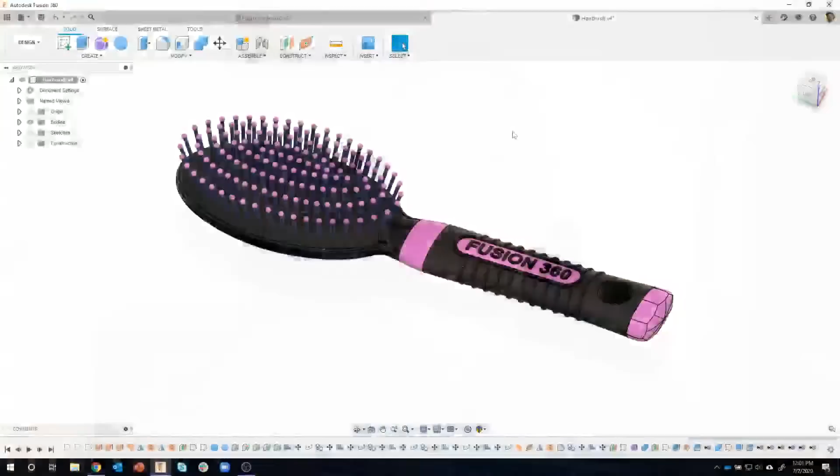So I'm going to go through and show some tips and tricks on how you can use pattern on a path. I'm not going to be able to do the whole brush today, I'm going to focus mainly on the head, but taking a look at the handle right now - pretty simple shape, kind of an elliptical shape. You can tell I used a free form to connect to that, and I'm actually basing this off of my wife's hairbrush. Hopefully she's not missing it right now and comes looking for it. But anyways, let's dive right in.

So I'm going to start by creating this curved surface. It's a little hard to see because of the black, but I'm creating this curved surface, and then we're going to use that to help us define the direction of these pins. You can see how they're perpendicular to that surface, and that's kind of the cool thing with today's project.

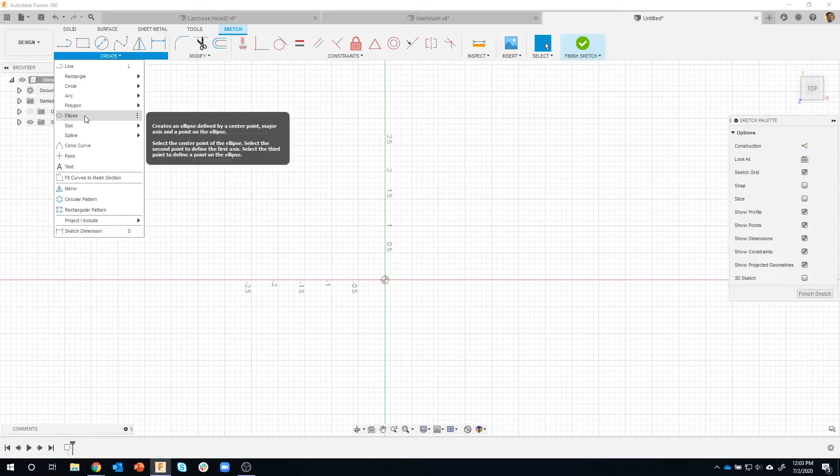Okay, so some of this is going to be similar, some of it's going to be new, but I'm going to start out by creating a sketch, and I'm going to start with an elliptical shape. Now, I don't use ellipse all that often, but in this case, the shape of the brush is an ellipse. So I'm going to start with the ellipse command, and it says place the center point.

So I'm going to start here, and then it's asking for either the width or the height. I'm going to go ahead and do the height, and according to my measurements it's 4 1/4 tall. Then I'll hit the tab key, and you'll notice even though my cursor is way above this, it's basically asking for the angle of this ellipse. So I'm going to click up here so it's vertical, and now as I move my cursor to the right you can see the overall length of it, and now I can say it's 2.5 inches wide.

Okay, so let me just move a couple of these dimensions so you can see what's going on here. So I created an ellipse, 4 1/4 tall, 2.5 wide. Now, with this project, we're basically going to be working in one quadrant and then mirroring a couple times, so I'm only going to work in one quadrant. Well, you'll notice that this is all one spline, or in this case, an ellipse.

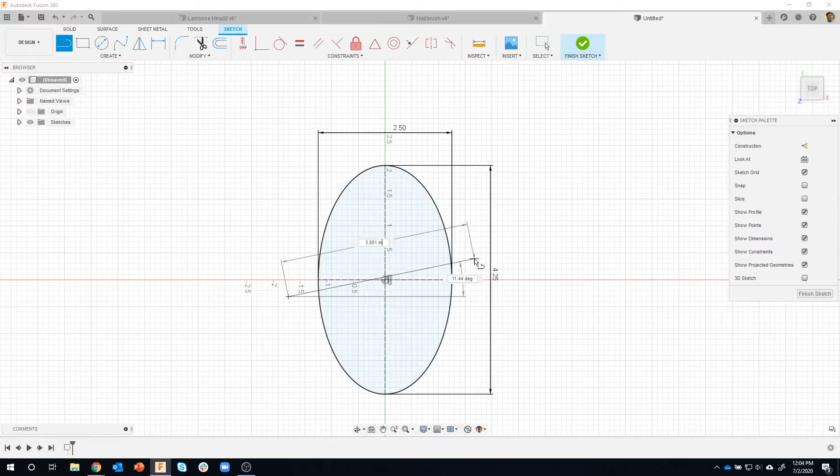So I'm going to create some geometry that's going to help me split this apart, and you've seen me do this before. I purposely over-exaggerate - instead of trying to draw a horizontal and a vertical line, I'm just going to do something like this. That way, when I come in and constrain it, I can visually confirm that everything's correct. So for example, I want that line to be coincident with my center point, and I can visually see that it jumped to the center point.

Same thing from there to there - I can see that it's now going through that, I shouldn't say center point, I should say origin point. Then I'll come in here and say horizontal, vertical. I'll click on that line and I can visually see that it's now vertical, click on that line, I can visually see that that's horizontal. You don't have to do it that way, but to me it's confirmation that it was done correctly.

I can also see, if I expand up my sketches, that these lines are black, and that means that they're constrained to the origin, for example. So I'm going to change these to construction geometry - let me just make sure I get that line there. So now you can see that those are construction geometry.

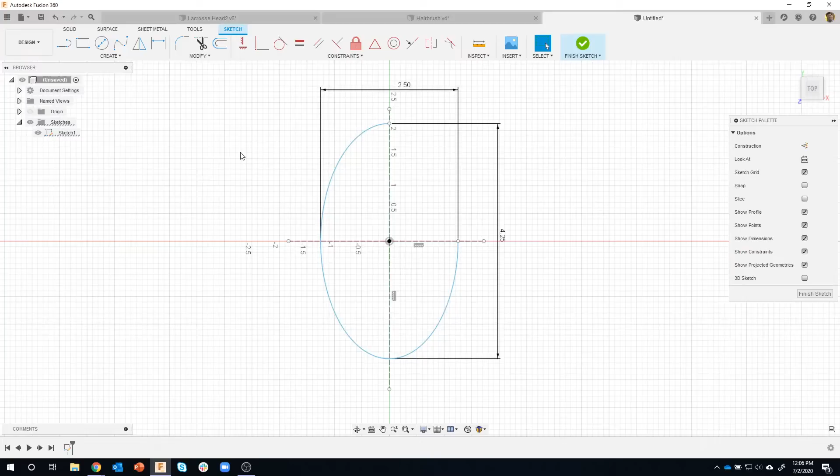Okay, so like I said, I need to split this, or we use the term break - I need to break this into quadrants. So under the modify command, there's a command called break. Now trim physically removes geometry, so if I came in here and said trim, it's going to physically remove that section. What break does is it just basically breaks it.

You'll see, it's kind of hard to see, but as I hover over, you'll see a little red X up here, and a little red X over here. So I'm clicking on this segment, and notice it warned me that by doing that we're going to lose some of our constraints, but that's okay.

Now you can see that this is its own segment. If I come over here, you can see it's 3/4 of a segment. When I said break, it went to the next intersection, right here, and broke it at that intersection, and at this intersection. So same thing right here.

I'm just going to hover over this line. You can see the red X appearing in this area. So I'll click, and I now have 2 segments. So we're basically breaking it. You'll notice it's still a valid profile.

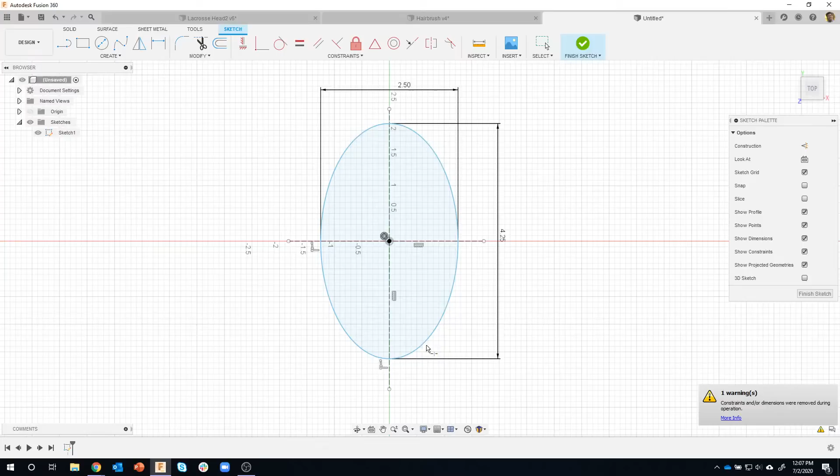I'm not trimming anything away. So I'll go ahead and break that segment there. I don't need to break this one, because by breaking it here and by breaking this one up here, it became its own segment. Okay, so that was the break command.

So I now have the overall shape of basically the head of the brush. Now I want to create the curvature, and to do this I'm going to use surfacing. But I want to create some geometry that's going to help me create a nice surface, so I'm going to continue drawing some geometry here.

So I'm going to say, let's create a sketch on this front face. Now here is where 3D Sketch really helps out, and let me show you why.

I want to create a spline. So I'm going to go spline, and you'll notice it's not snapping or catching to this profile because I haven't projected anything. There's nothing on this sketch. You'll notice if I turn off my original sketch, there's nothing there. So that's why it's not catching to it.

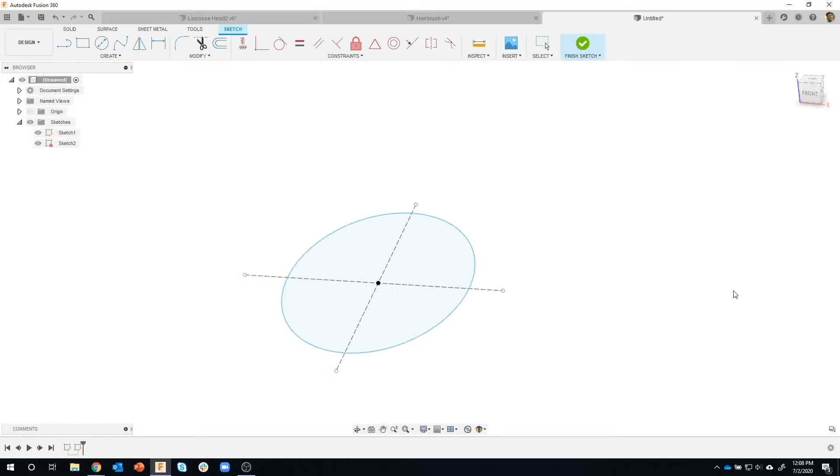However, if I turn on 3D Sketch, it doesn't instantly put me into 3D Sketch. So here's one of my tips: I turn it on, I say Finish Sketch, then I edit that sketch again.

And you'll notice it's turned on. Now when I do the spline, you see this triad icon that appears, and that's a visual confirmation that I'm in my 3D Sketch. But check this out, now notice it's actually snapping to this spline. I didn't have to project anything, but 3D Sketch has some smartness built into it.

So I'm going to get near this point, and you can see it turn to a square, so I know I'm at that end point right there. So I'm going to click there.

I'm not going to go into too much detail about 3D sketching, but you'll see that this plane is blue, so it's going to basically be drawing in that plane, in that direction. So if I were to click up here, it's going to basically be in line with this. It's not going to go way back here in space somewhere.

So I'm just going to click somewhere up here, I don't really care right now where. And then I'm going to come over here, and again you can kind of see it snapping to that edge, but I'm going to make sure I see that little square, and I'm going to go ahead and click there. And I'm going to say that I'm done.

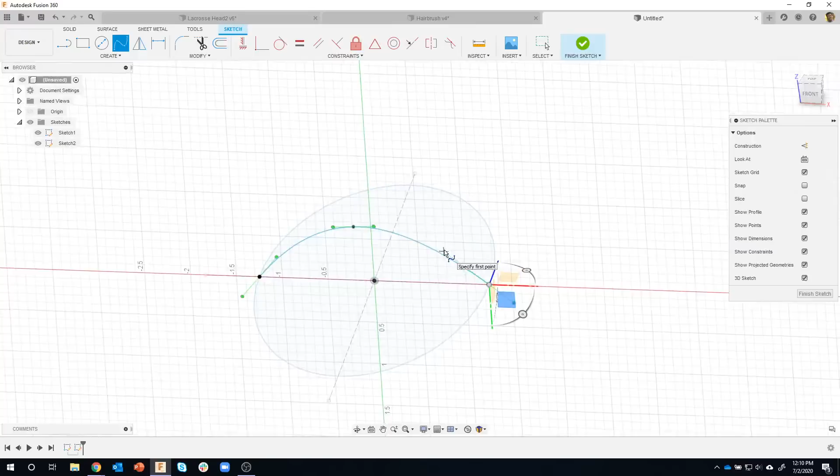So what did it do? Well, it created a flat spline. I'm kind of looking down at the top of it, on that plane, exactly from the edge there, exactly to the edge over there.

Now I want to make sure that this point is straight up and down, so I'm going to use the line command. I'm just going to go from that point there to that point there. Okay, I'm done. Then I'll constrain this.

I'll say I want that to be horizontal vertical, and watch what it does. See how it kind of moved over and that line is now vertical.

Now this is a pretty steep curvature to the surface, so I'm going to throw a dimension on here. Again, this is all just taking measurements off of the existing brush that I had, so this is supposed to be 0.35, and watch what happens to my spline. You'll see it still is touching those corners, but it's now kind of more of a slightly crowned curve, okay?

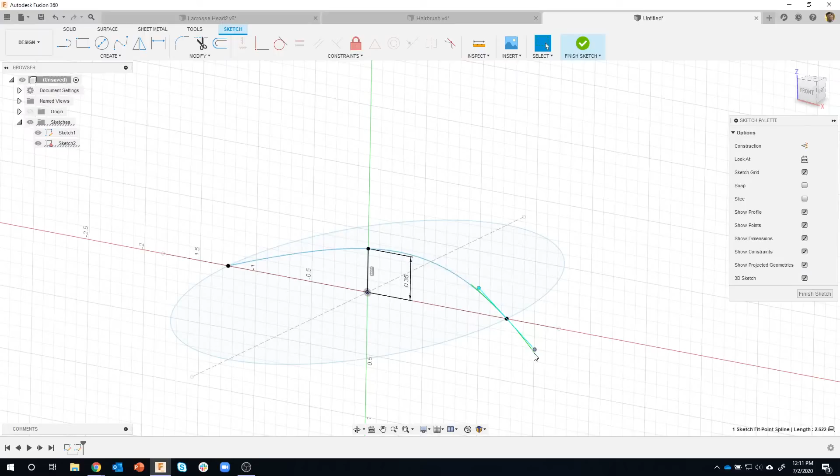Now these green handles here allow me to change the tangency direction and the tangency weight. You can kind of see how this one slopes gradual to that point, but this one comes across and then steeply goes down. So you can control the weight, which is how strong this tangency condition is.

And you can also control the direction of that tangency. Believe it or not, you can actually dimension from this edge to this edge and say I want that to be 45 degrees if you wanted to. In this case I'm not going to, I'm going to leave everything default right out of the way it was. Let me make sure, undo.

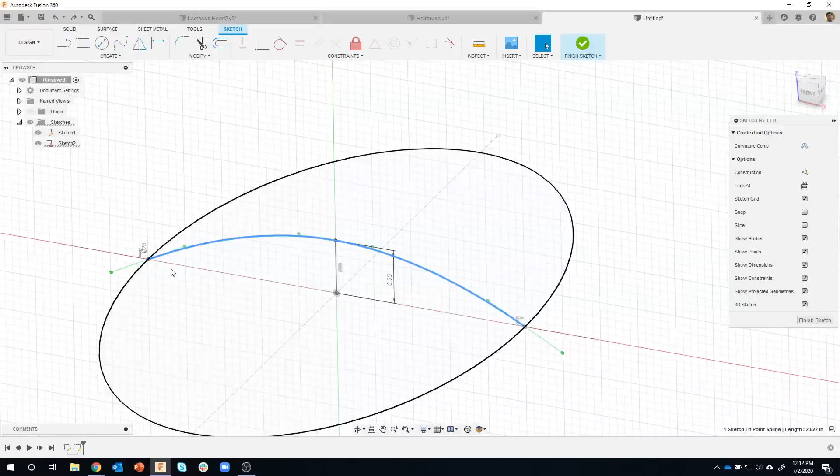So I also want to split this spline, because you'll notice it goes all the way across, and like I mentioned, we're only going to be working in quadrants. I should quit using the term split, I'm going to say break. I hover over this line and again you can see that little red X appear, so I'm going to go ahead and click that. I've now broken this spline into 2 segments.

So that's going to define the curvature in one direction. I also want to define the curvature in this length direction, so pretty much the same thing. I'm going to create a sketch on this front face.

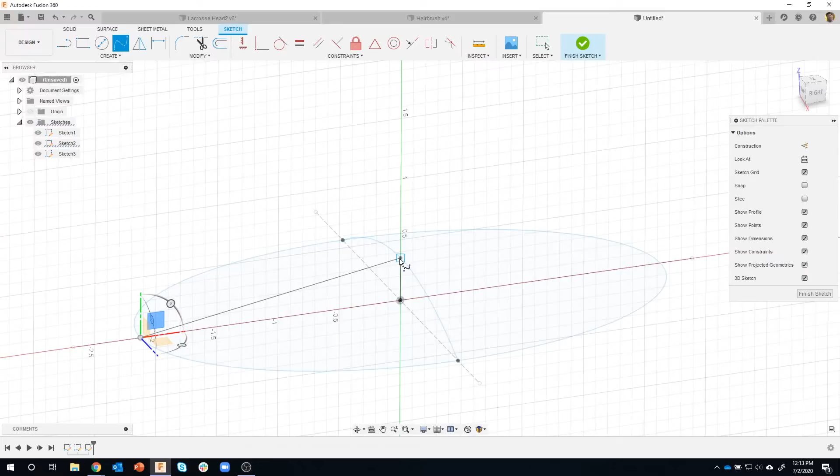I'm in my 3D sketch. So what I can do is come over here and you'll see it turn to like a square, so I'm going to go ahead and click there. Now I do want to make sure that I catch to this point right here, so I'm not going to randomly go somewhere else, I'm going to go there and click. So my spline is going to go through that point. And then once again, I'll come over here, wait until it turns to a square, and say OK.

Now I need to break this spline, so I'm going to come in here and say break. But watch what happens when I hover over this line, I do not see the red X.

So I'm going to do something a little bit fun here. Pop quiz, if you think you know why, throw it in the chat real quick, you don't have to be lengthy. Just why do you think the red X is not appearing when I'm doing this break? I'm going to pause for about 10 seconds here.

Let you guys throw your answers out there. So does anybody know why it's not letting me break this? We'll give you guys a few seconds to answer. Al said no point at the top. Joel said there's no intersection. Fred said it's a bug—nope, it's not a bug, I can prove that. Joseph said he always makes the mistake of clicking and not escaping after the spline. Angelo says he knows why. Chris, I'm going to give you the gold star for the day, he said vertical line is in a different plane. Somebody else said because it's in the other sketch. You guys are too smart, you shouldn't be watching my live streams, you know all this. So that is exactly correct.

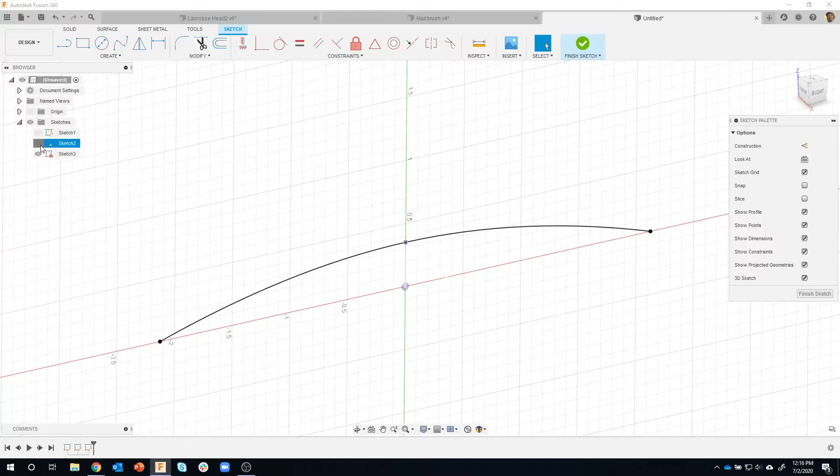Okay, so let's see what happens if I try the break command. I like James, he said it was a human bug—yep, it was my fault because I hadn't projected it. So human bug. Now notice I'm hovering over this section and there is that little red X right there, so I'm able to break this into a separate segment.

Now why am I really highlighting this? This happens to me a lot, and I also take quite a few calls from customers where they're like, I go to extrude and half of my geometry isn't a valid profile.

Well, it's because it's actually on a different sketch and they didn't realize that they had created a third sketch or something like that. And when they go to extrude, sketch number 2 and sketch number 1 aren't active and they're not being extruded.

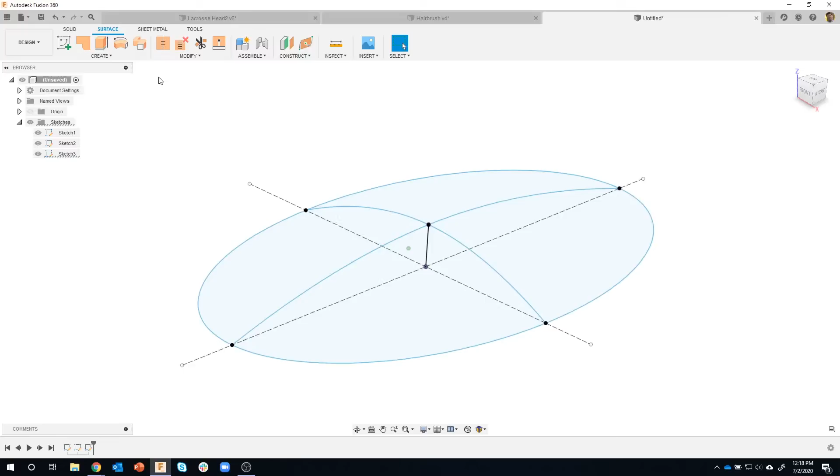So I'm going to come in here and say create a patch. It basically allows me to specify a boundary and it's going to fill in. So watch, I'm going to say patch. And then notice because we've split this, I can click here, I can click there, and I can click here, and I get a surface. It's like a piece of paper or fabric that is being created by those 3 lines.

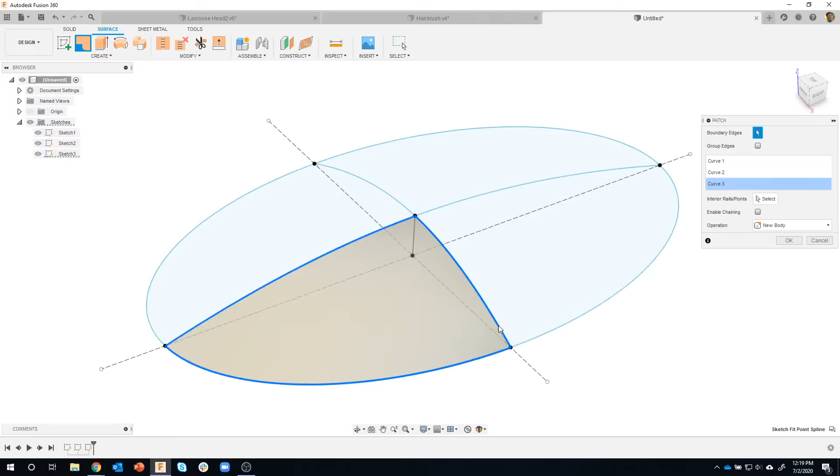I could even specify an interior rail if I wanted to, but the key thing I wanted to point out here is notice it says curve 1, 2, and 3, but there's no options here. It's literally just filling that area in with a surface, with some material or whatever. So keep that in mind.

I'm going to cancel out. So here's the trick that he showed me, which I think is pretty cool because it gives you more options. It takes more steps, but it gives you more options. I'm going to come in here and say extrude.

Now watch what happens when I hover over this edge - it highlights the whole edge. And you're probably saying, well, didn't we just spend 15 minutes splitting those edges or whatever? Well, it's because this chaining is turned on. So I'm going to turn chaining off. And now you'll see it's its own edge.

I'm going to grab that edge and just drag it some random distance - it does not matter how far. I'm just going to extrude that edge back. Now if I expand open my bodies, you'll see there's a little surface right there.

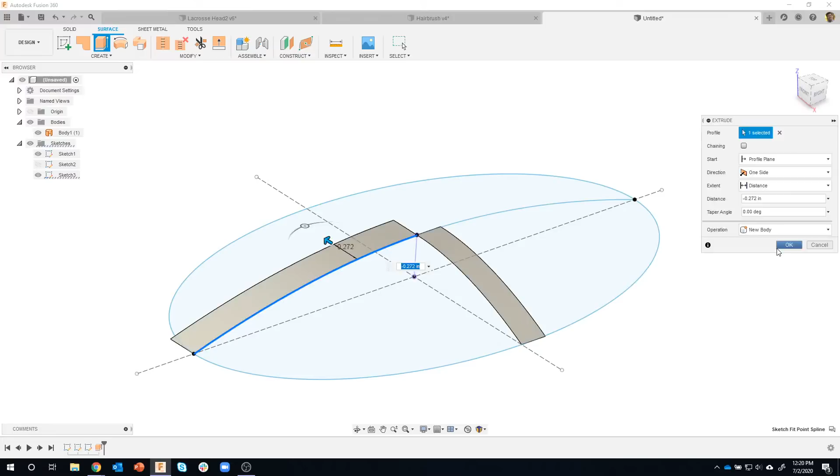I'm going to continue doing that with these 3 quadrants, these 3 edges. So I'm going to extrude an edge back that way. And then I'll also turn off my chaining, extrude this edge down.

Okay, so what did we do here? Well, we basically again created some kind of a boundary, but now there are surfaces that are going to be touching that. So watch, I'm going to do the exact same command. I'll come in here and say patch. Okay, what are my boundary edges?

So I'm going to say that edge there, and this edge here. Now notice they're labeled - even though I clicked this one last, it says this is edge 1, edge 2, and edge 3. And it looks pretty similar to what I created earlier, okay? But notice the options that I have.

So edge 1, I don't want to mess with - in fact, I'm going to purposely mess with it to show you what these options are. It says connected, so there's G0 continuity. It basically means this surface is touching or connected to this surface, okay?

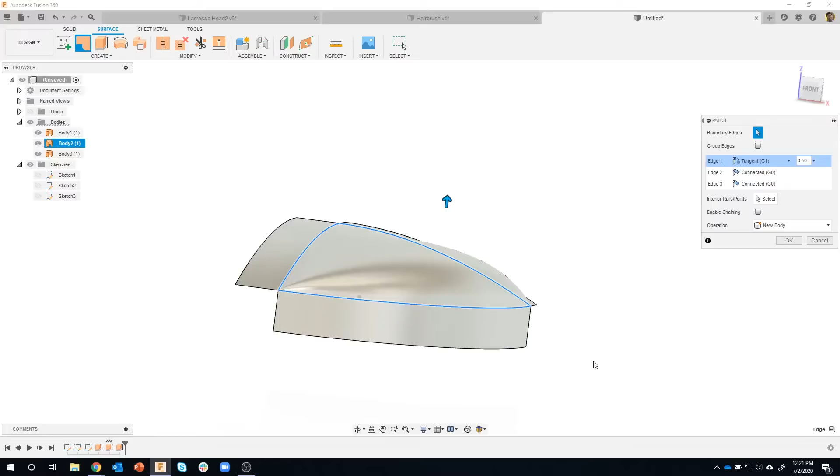Well, if I came in and said, you know what, I want to make that tangent, look what it does. In fact, I'm going to rotate to the side. You can kind of see it's really having to modify the shape of this, but it's basically taking that surface and making it tangent to edge 1.

So it gives you a lot more power. For example, I could say I want edge 2 to be tangent, and you can't really see much happening, but what it's going to do is smooth this out and end up being tangent with that surface. Whereas when we just did the 3 edges by itself, there was no tangency control or connected control or curvature or anything like that. And you can see you actually can change the weight of this if you want to.

So I can come here and make both of these surfaces tangent, and it's going to create a much nicer looking surface for us.

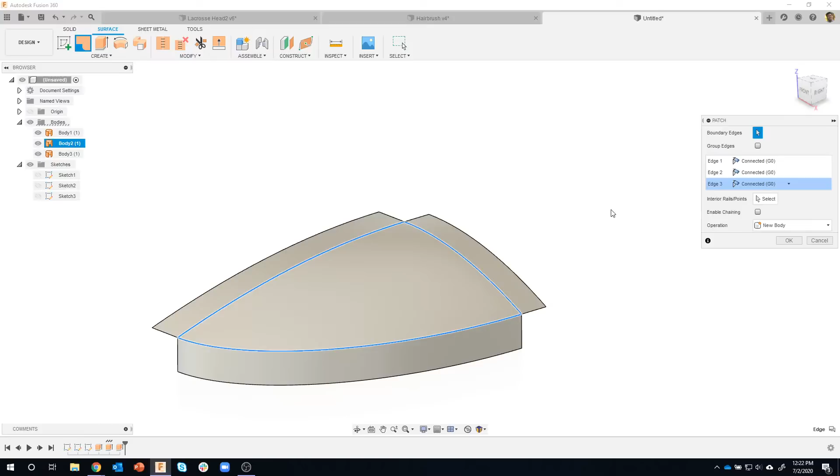Now in this example, I'm just going to leave everything connected. I don't want to worry about tangencies or anything like that right now, and you'll see why here in a little bit. But I wanted to highlight that because Jeff Smith, who's on our team, showed me this, and I thought it was a really cool tip.

Okay, so I'll go ahead and say okay, and now you'll notice I have all 4 of these bodies. I'm going to turn off the ones I don't need.

I'm left with this one little patch. Because everything's kind of symmetric, I could come in here and say mirror. What do I want to mirror? I want to mirror that body. What's my mirror plane? Because I created everything at 0, 0, I can select this vertical plane right here, and you'll see it's going to mirror along that plane.

But watch what happens over here when I say okay. It is now 2 separate bodies. I want to stitch these together.

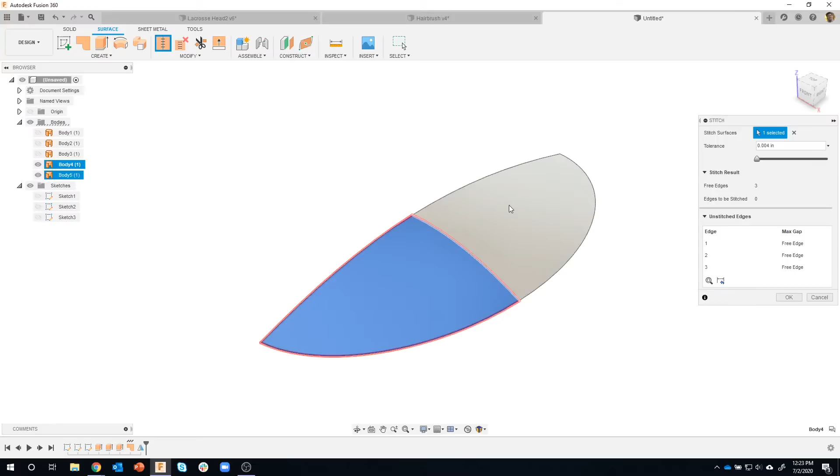Another tip that Jeff gave me was stitch as you go. So instead of doing all 4 of these and then stitching them, he recommends stitching as you go. So I'm going to go ahead and stitch that surface to this surface. We're basically sewing it together.

You notice how the edge turns green. It obviously can't stitch these outside surfaces — there's nothing for it to stitch to. So I'll stitch that together, and you'll notice we're back to 1 body.

Then I'll go ahead and mirror this one more time. Notice it's 1 body. What's my mirror plane? That guy there. I'll say okay.

We'll stitch that one to that one. You can see the green line, which is good, and we are back to 1 surface body.

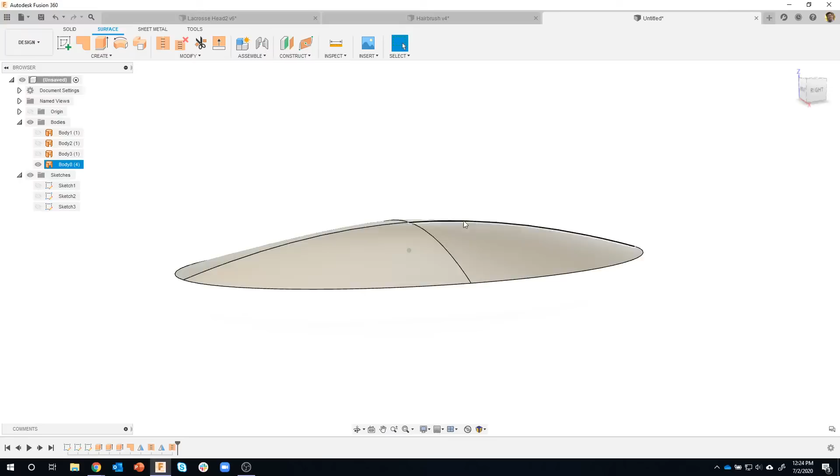Now, I told you earlier I don't care too much about the tangency conditions or anything like that, because we're basically doing plane along a path. If I were building this as an actual surface, I would probably spend more time with the tangencies — I might control the angle that this slope comes into this edge, etc. But that could take a whole session just on surfacing, so I'm keeping this fairly simple.

So the next thing I want to do, now that I have the basic shape, is put all of my little pins. I need to create some paths for those pins to follow.

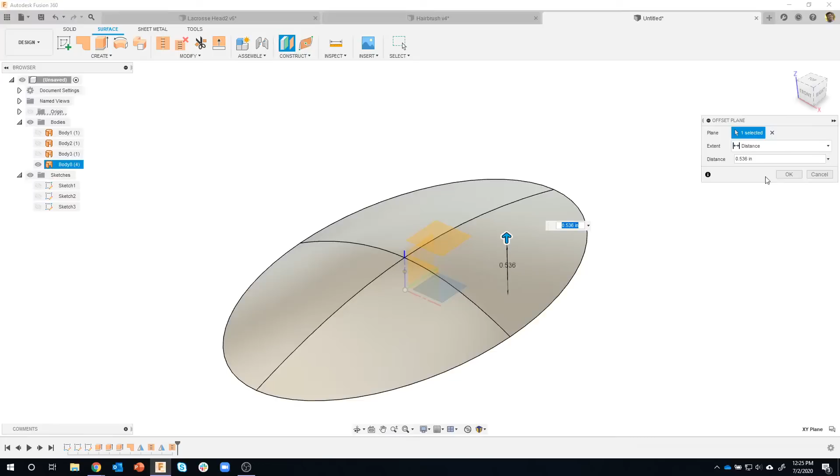So I'm going to do an offset plane. I'll offset this horizontal plane, which is way down here, and just bring it up some distance. It doesn't matter — I'm just making it above my object. And then I'm going to create a sketch on that plane.

Now you'll notice my screen did not go orthographic like it usually does, and that's because I'm still in my 3D sketch. I'm actually done with what I need 3D sketching for, so I'm going to turn that off. You'll notice nothing really happens, so I'm going to say finish sketch. I'll come back into that sketch, and now you'll notice it's orthographic — it won't have that triad anymore that gets in the way that you usually see with 3D sketch.

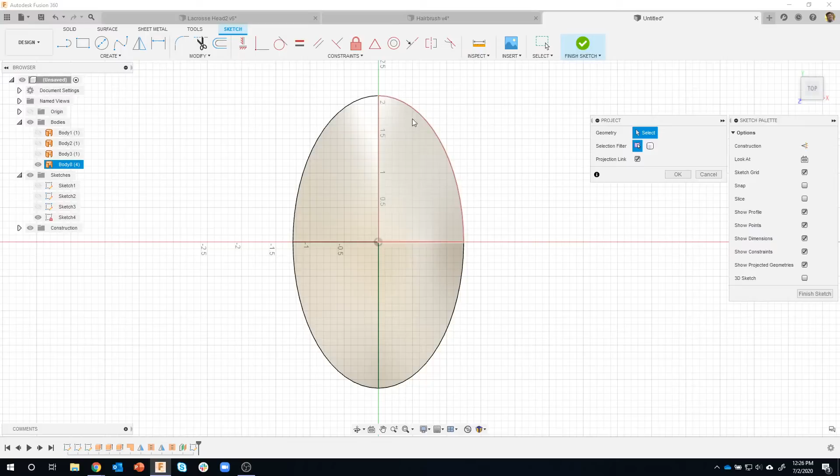Okay, so I want to create some equally spaced elliptical paths for these pins to follow. I'm going to project, so P for project, and you'll notice right now it's on specified entities. So I could project each quadrant, or pick this edge, then this edge, then this edge, but that would take some time.

Or I could say bodies and watch what happens — it's going to basically do a silhouette of the whole body. So when I click on that and say OK, it projected all of those edges for me in one click, instead of having to do it manually, click after click after click. So that was the bodies option in project. By default, it's usually set to specified entities.

Okay, cool. So now I have this shape. I'm going to use the offset command in Fusion.

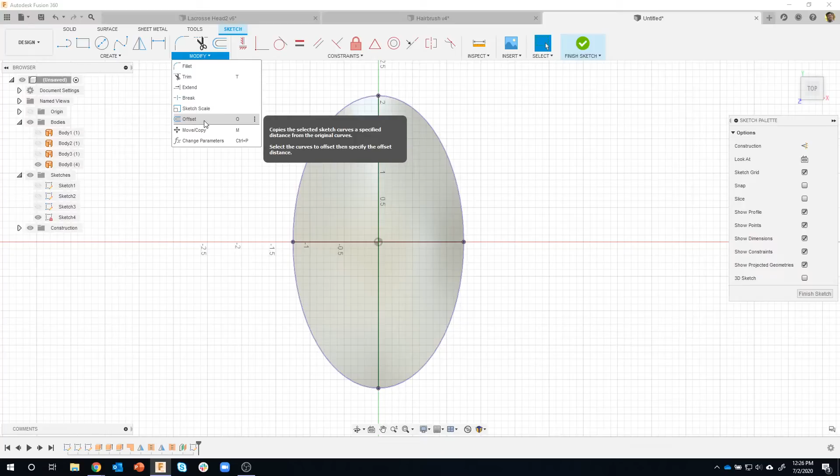You can't use pattern to do this, so I'm going to use offset again. You'll notice if I try to offset this line, it says one or more of the curves has already been offset, consider offsetting the original profile again. So this is something with Fusion: you can only offset the original. You can't offset an offset, or offset two offsets or whatever.

So I'm going to offset this guy, and I'll say let's go 0.5. You can see I get that result. I'll click on here again and say let's go 0.75. And you're starting to notice, because of how we're offsetting, that our ellipse is not as round down here anymore.

But that's exactly how it is on the actual product, let me show here. You can kind of see how they come to points and stuff like that the closer we get to the inside. So it's actually doing it just like the actual product, which is kind of cool.

So I'll come in here, let's do this one. I'll offset that one. And then there's a row that's just a single line basically right here. So I'm going to draw a line, again kind of some weird shape like so.

I'll make it vertical, and I'm going to say I want the midpoint of that line to be at 0,0. Okay, so now if I were to change the length of this line, you can see how it's constrained and it's equal and all that kind of stuff.

So I just created a line, made it vertical, and then I made the midpoint be right there at the center. Okay, so if I rotate this now, you can see that we drew all of these on a flat plane above this surface.

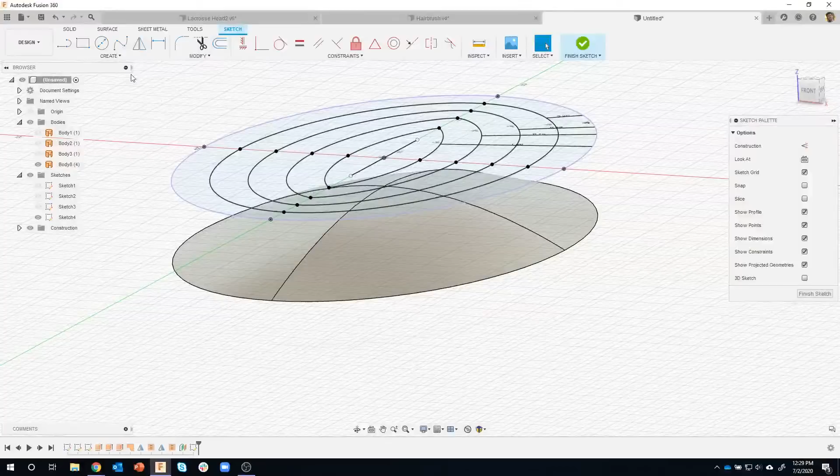Now there's a really cool command in project. We usually use this project right here, but notice there's one in here called project to surface.

Now I'm going to purposely make a mistake here because this happens a lot. You might get this error message and I'm going to explain what it means. So I'm going to say project to surface. Okay, and it's asking what face.

I'm going to go ahead and select one face, and then it's asking for a curve. I'm going to go ahead and click on this curve. And then finally, notice here's the warning: no support for projecting sketch geometry into the same sketch. Please change the target sketch or geometry.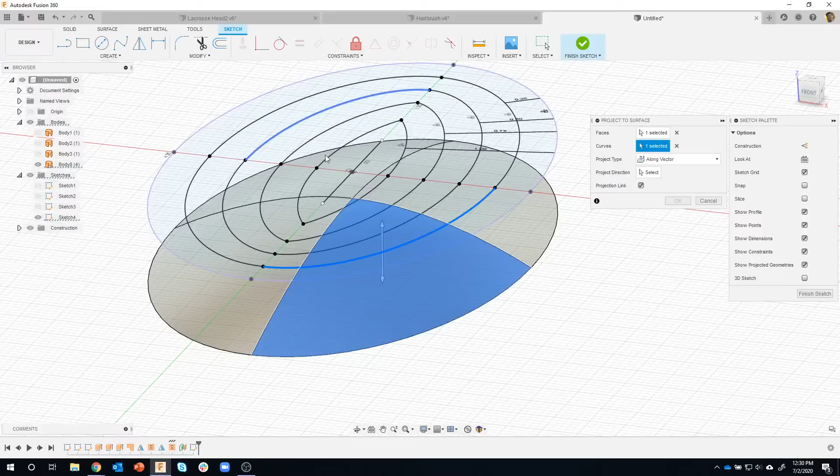And when I first saw this, I'm like, what does this mean? Well, basically what we're trying to do here is we're using this geometry and we're wanting to project it onto a surface here. So what it's saying is you can't project this onto the same sketch.

So I'm going to say finish sketch, then I'm going to create a new sketch. And it doesn't matter where. I'm going to, again, click on this bottom plane. It really doesn't matter in this case.

Then I'm in my sketch. You'll notice I now have two sketches: sketch 4, which is all of these little rings, and then sketch 5 is this new one.

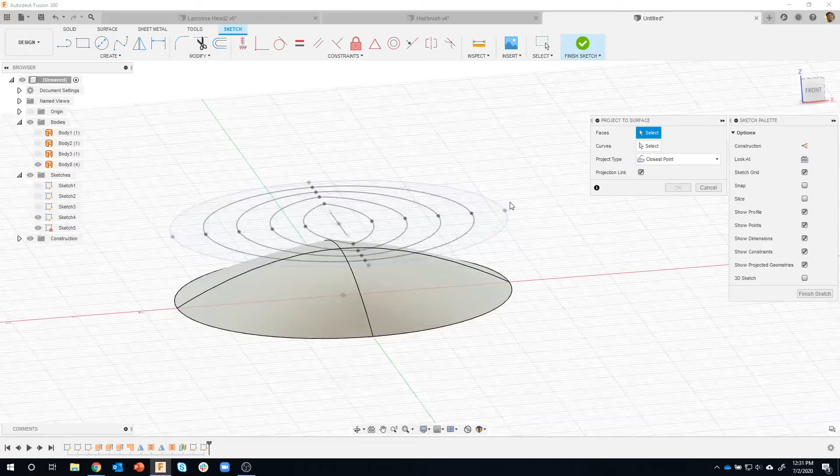Now I'm going to say project to surface. By default, it's usually set to closest point. Now that works great if your stuff is planar, and what that basically means is it would take this curve and try to get it to the closest or shortest distance to that surface.

So that could be, it's hard to point out, could be in this direction here, could be in this direction here, who knows. Well, I want to basically project this down, almost like we're wrapping it onto the surface. So I'm going to change my project type to along vector, and this is going to allow me to specify which direction. You'll notice it says project direction, and I can click on, let me zoom up here a bit, this vertical axis right here, this blue line. I'm going to click on there, and you can kind of see it gives me an arrow preview that the lines are going to project in this direction until they hit a surface.

So what are my faces? I'm going to click these 4 faces. What are the curves? Check this out, I'm going to click on that edge right there, and you can see that sure enough it projected it straight down onto this curved surface.

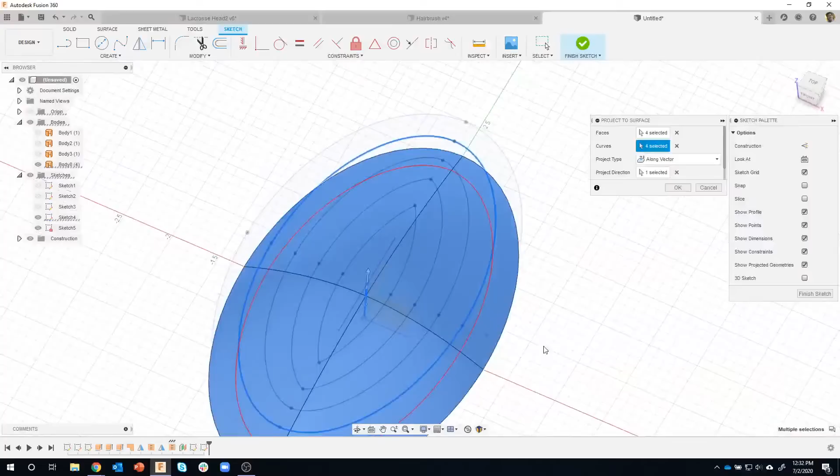So I can go ahead and click around, so you can kind of see, I'll do that, and I now have a ring. Let me look at it from the top. You can kind of see it follows that path, but it's on the surface of this part right here.

You can kind of see how it changes as it goes around that surface due to the length and width and stuff. So I'm going to continue clicking around. Because these are split, I'm having to do these in pieces, but I need the full path. So I got that guy, so I need this guy, that guy, and this guy, and then finally that line through the center.

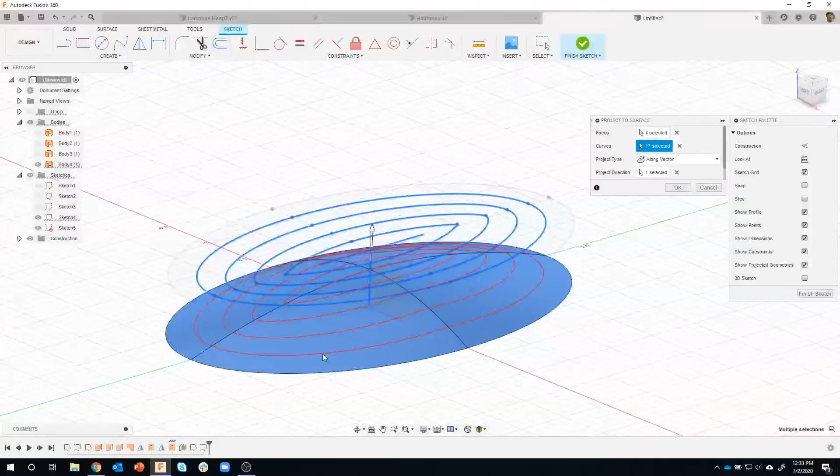Now you can kind of see the curvature of this. They all match looking down from the top. Pretty cool. So I use that along vector a lot, it's a pretty neat project to surface along vector.

A little confusing here, so I'm going to turn off Sketch 4, and you'll see that Sketch 5 is actually a 3-dimensional sketch, basically a 3D sketch. So now we have the surface, we have the paths that we want to use.

What we need to do now is create the object that we're going to pattern on these paths. So I'm going to say finish sketch, switch back to my solid, and just create a cylinder primitive, because these pins are basically just a cylinder with a round head, and I'm going to show how I did that.

I could create a sketch, draw a circle, then extrude, but if I just go to cylinder, it's going to allow me to pick a sketch plane. Let's just do that guy there. I'm just going to draw it out here in space somewhere.

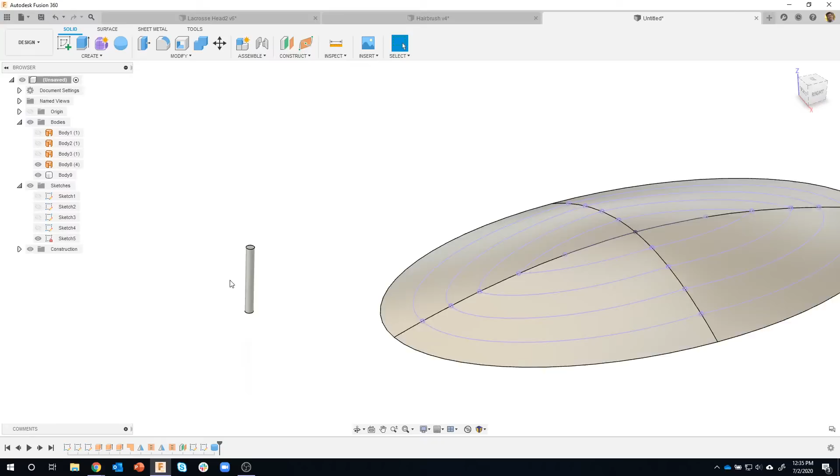Now these are pretty small, in fact they're 0.066 inches in diameter and 0.55 inches tall. You'll notice it says new body, I'm going to go ahead and say okay. I just quickly created a cylinder that's 0.066 in diameter and 0.55 tall.

Now I want to put that bead or ball on the top. So I'm going to zoom up on this guy, go to create, and create another primitive - a spherical primitive. It's going to ask where do you want to create it. Well, notice I can click on this face.

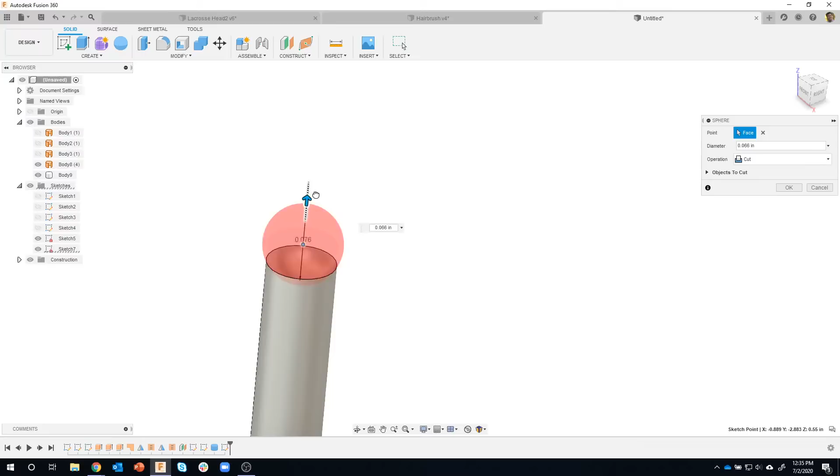And if I get near the center, it's kind of hard to see, but it snaps to that little round icon right there. By default, it wants to cut, okay, you can kind of see that. But in this case, instead of cutting, I want to join, and it's going to basically add a sphere on here.

In fact, let's make it, I think it's 0.1 in diameter. Let me zoom out just a little bit, and you can see I quickly was able to create that head on the pin.

Here's another tip: when you start patterning things, think ahead a little bit, especially if you want to apply materials. You'll want to do it to the main part, and then when you pattern that, they'll all be that same color. If you just pattern it right now and then come back and say okay, I want to make them blue, you have to physically click every single one, which takes some time.

So I'm going to go into my appearance. Under modify appearance, I always use the A key, the shortcut key. So for example, I'm out here in space, I just hit A, and you can see it brings up my appearances. Here's my default appearances.

I'm going to just go into plastic, you can see all the different kinds of plastics we have in there, and I'm just going to do a translucent plastic. Now I want these to be kind of a dark black, but I want them to be glossy. You can see glossy blue, gray, green, red, etc., white, but you don't see a glossy black.

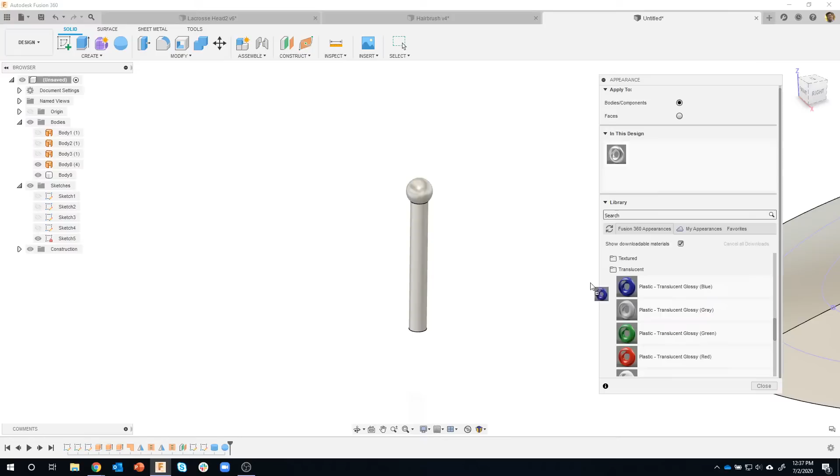So I'm just going to drag this blue onto this body, and here's another tip that's coming up. I'm going to drag it onto the body, and you can see the whole body turned blue. I'm going to show you how we're going to just change the head of the pin here in just a minute.

Okay, so let's right click and edit, and this will allow me to change the color. You can kind of see I can just drag this guy around, and I'm going to bring it down to a fairly dark - it doesn't have to be perfectly black, but I might do like a grayish black, like so - and say done.

You'll see that the icon kind of changed to, even though it says blue, it's kind of a black color. Well, I want this to be a kind of purple or magenta color, and I don't see a purple or magenta in here, so I'm going to change this to faces.

I'm just going to drag red and drop it on that face, and you'll notice that it only applies the material to that face. If you forgot and did it to bodies, it would turn the whole thing red.

I'm going to right click and edit this guy, and I said I want it to be kind of a magenta color, so I'm going to drag this slider over here. I can change the color just by dragging this point over here.

Here's another tip that not a lot of people know about: this color library right here. These are all your Pantone colors, so you could search for, for example, violet, and it's going to show all the different colors that have violet in it.

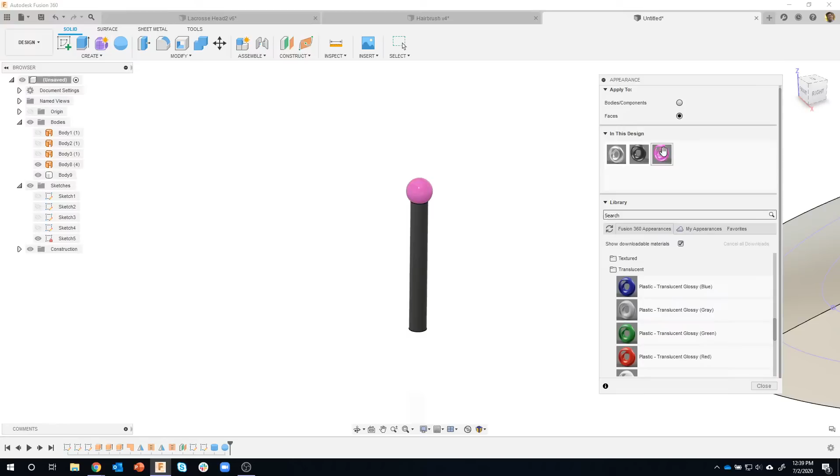I'm going to go ahead and pick that one there, and it will use that particular color. If I were to do violet quartz, for example, you can see how that's much darker. Oops, didn't mean to duplicate it, sorry.

Let me edit that. Again, that's the Pantone colors if you want to use those. I'll use that one there, looks pretty good. And there's my single pin. In fact, I'm going to rename it to pin.

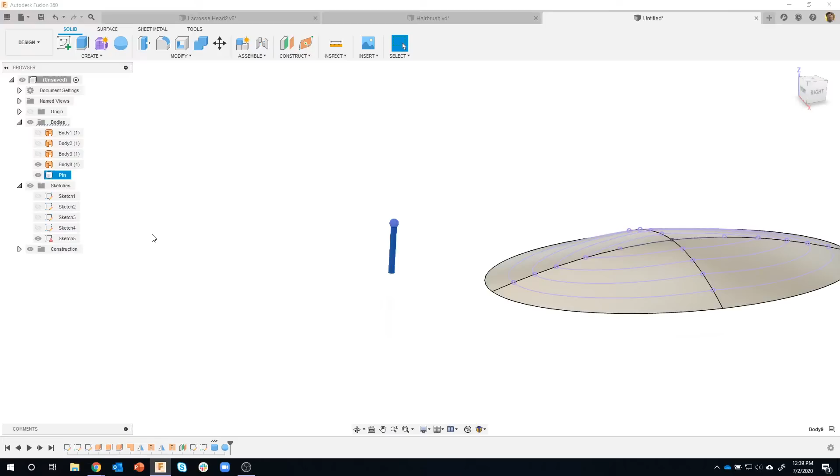Okay. Hopefully this is going good for you guys. I can see Angelo's talking and answering questions.

Now I need to align this pin to be perpendicular to this surface. If I just came in here and said move, from point to point, I'm purposely making a mistake. I'm going from there to there. It moved it, but you'll notice it's not in the right direction, and I would have to rotate and figure that out.

Well, of course, no, we're not going to do that. We're going to let Fusion do the hard work. I need to somehow align this at a very particular point on this transitional surface here. So I'm going to build some axes, and one of them is axis perpendicular to face. I want it to be perpendicular at a point. Now you'll also notice it says axis perpendicular at point.

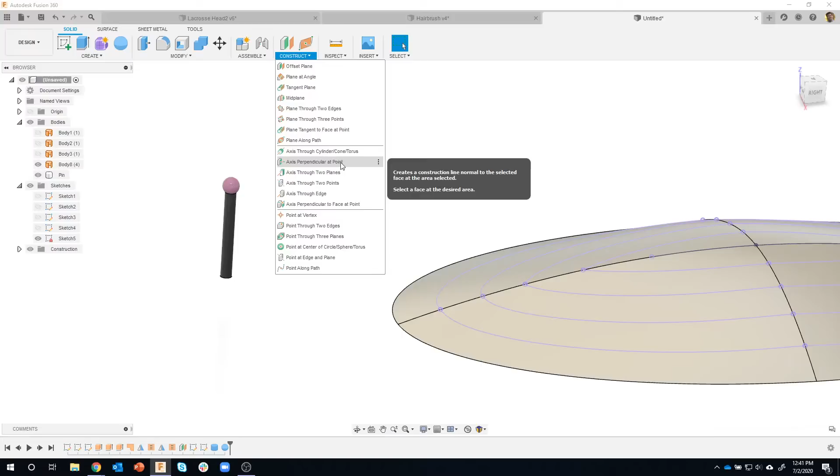I don't use this one as often because basically what it allows you to do is you can just click somewhere on that face, and that's where it's going to put that axis, and I didn't get to specify a very specific point. However, axis perpendicular to face asks, what is the face?

So I'm going to go ahead and click on that face right there. Now it's asking, what is the point? And I'm going to click that point. Notice what it did - it created an axis that's perpendicular, 90 degrees, at that point. It's a really cool option.

Also, new little tip if you didn't know this - you can change the length of your axes just by grabbing the endpoints. As I go through, you're going to notice that some of these axes get kind of weird, so I'm going to do that again.

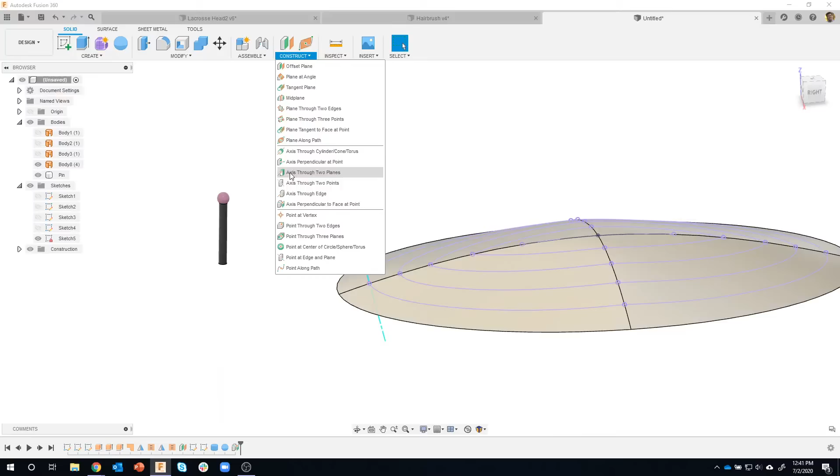Axis perpendicular to face, at a point. I'm going to click on that guy there, and I'm just going to repeat this a couple times. At that point there - I see, like what I was talking about - this one, for whatever reason, gets really long.

I'll repeat just by clicking and dragging my right mouse click straight up. So that face, that point, and then finally that face at that point. And it put it underneath, it looks like.

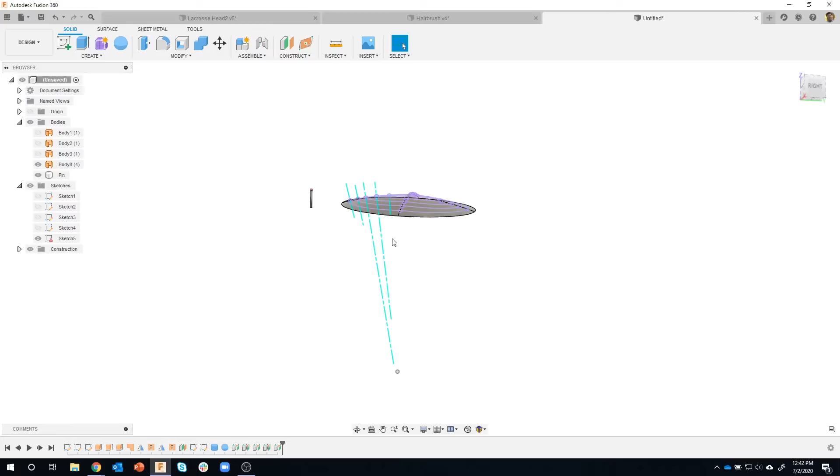Okay, so I'm going to fix a couple of these. I'm going to drag that point up. I might drag these points down - they don't need to be that, though you could leave them that way if you wanted to. To me, it makes it harder to fit your screen when there's extra geometry.

Same thing with this guy. Oops - I'm going to turn off the body to help me with this. I need to make sure I'm grabbing that point right there. Okay, so now I have these axes.

We're going to use the align command - this is really powerful. So I'm going to say align. What do I want to align? I want to align this body. Now notice as I hover over it, it's almost like creating the joint, creating an assembly joint.

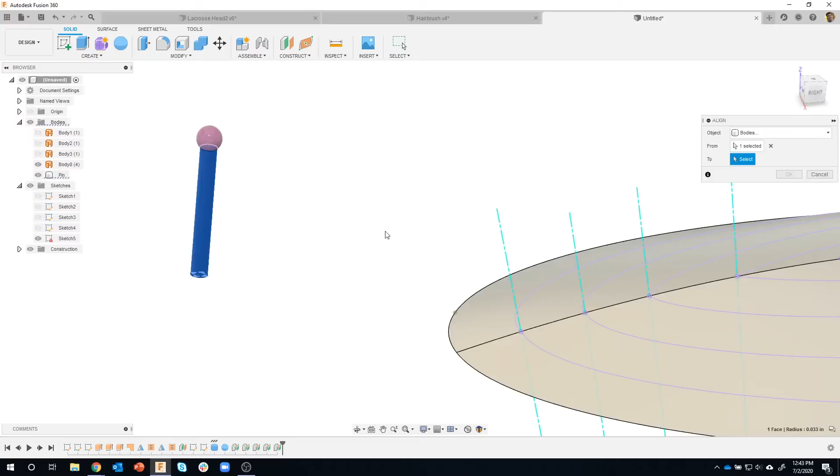You can kind of see these little tick marks. So I want to grab this bottom tick mark and align it to this line. Watch what happens—you can see how it lined that up, and it's on that axis, perpendicular to the surface, but you'll notice it's not in the right location. It only aligns it, it doesn't let me position it.

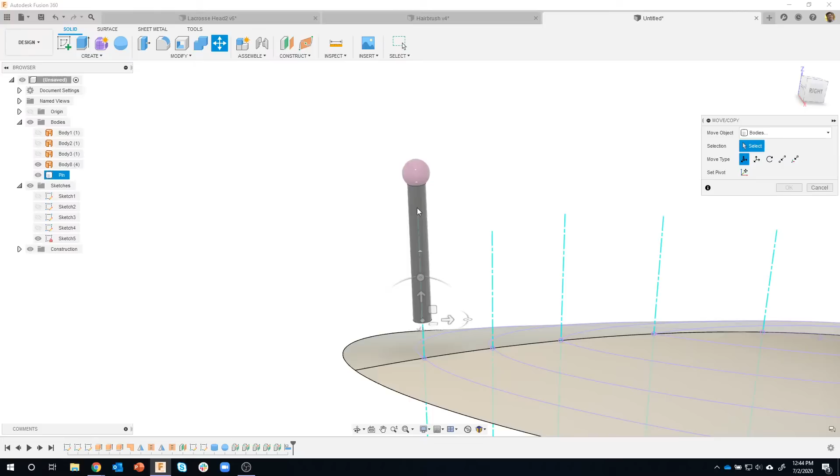So I'm going to come in here and say move, and I want to move this body. Here's another tip: as I hover over the sphere, my arrows kind of point randomly in different directions. But if I hover over the cylinder, the arrows are rotating around, but that Z direction arrow is always pointing up, and that's all I care about right now. So I'm just going to click there.

This is going to allow me to slide this pin up or down. To appease everybody, I could say go from point to point. So I'm going to go from that point there to that point there, and it's going to move that cylinder to that point, and keep it in line.

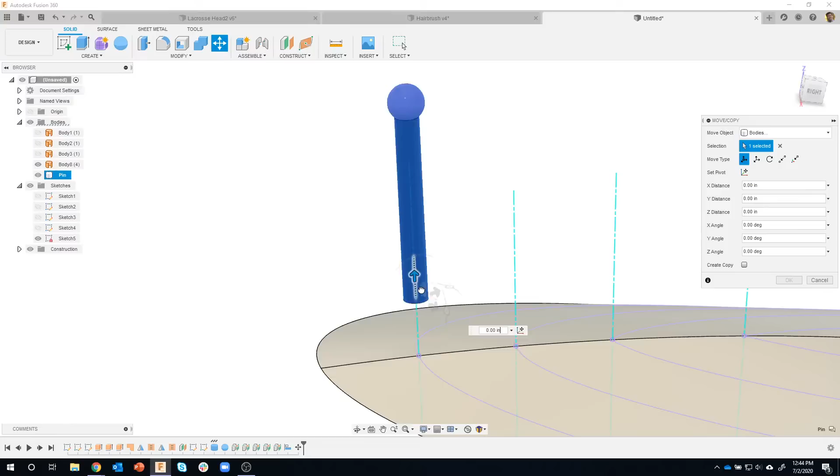Or I could do it kind of how this thing is manufactured—I could just drag this down until it intersects, because it actually gets pushed down into the fabric. I honestly don't really care how far, I just want it somehow intersecting this surface, because maybe when I join it later, I want to make sure that it's going to join. If I just went to the point, it could leave a little gap underneath it that I'd have to figure out and fill in. So I'm just going to sink it down into this surface a little bit.

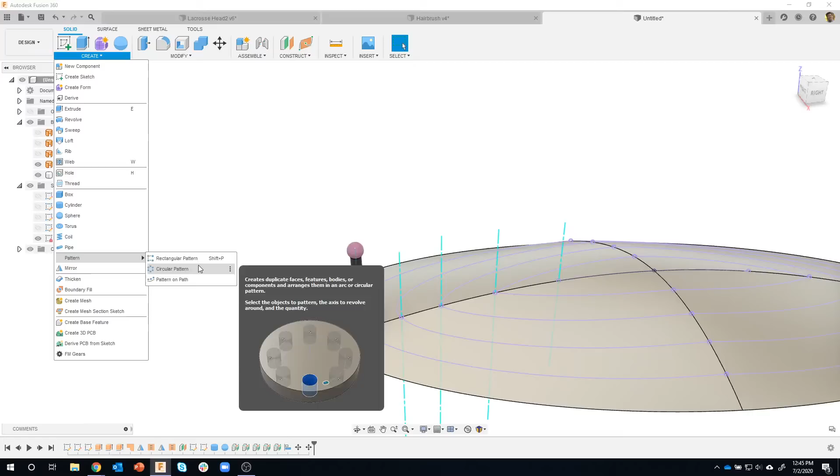And I'm going to go ahead and say okay. So there we go, we got our first pin. Finally, we're going to get to the command that this live stream is all about, and that is pattern on a path. I've shown rectangular patterns, I've shown circular patterns, but what is this pattern on a path?

I'm going to go ahead and start to drag this arrow, and you'll see it's giving me a live preview of what this is going to look like. And as I continue around, you can kind of see how it's patterning this along that path.

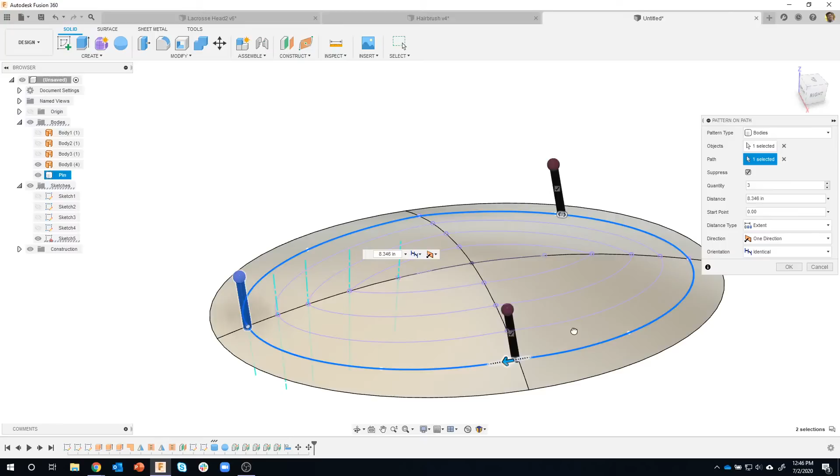Okay, so I'm going to come back here. You'll also notice this suppress checkbox on each of these—it's kind of hard to see, it's kind of buried inside the cylinder right there. But you could say, I want 100 of these, but turn off number 5, number 50, and number 99, for example. You could suppress those if you want. To speed things up, I'm going to turn that off because I don't want to suppress any of these pins.

And then it's asking for the quantity. And yes, I counted the number of pins on my wife's hairbrush. So I'm going to type in 42 for this outside ring, and notice the preview that I get.

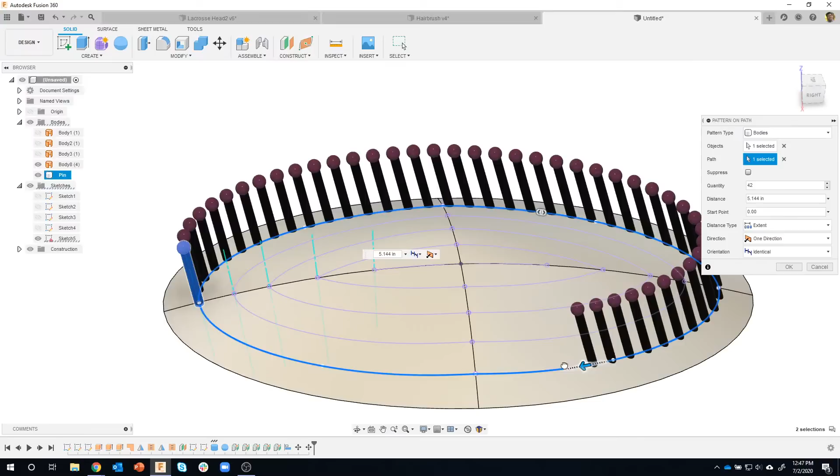So I'm going to go ahead and continue dragging along this path, and you're going to start to see that they spread out a little bit more. But you're going to also probably go, whoa, those look really weird—they're all leaning the same direction.

And that is right here—this orientation is set to identical. So whatever angle this object is, it's going to keep that angle as it travels along that path. So I'm going to change it from identical to path direction, and notice what we get. It's basically almost like it created an axis at every single location, and these pins are now perpendicular on that path, on that surface. I think this is wicked cool.

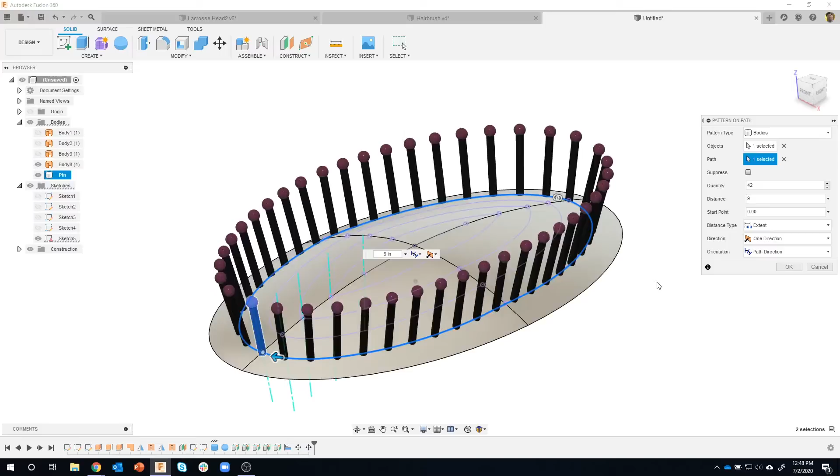Now I can come in here and adjust the spacing or whatever. I can see we're pretty close to the distance of 9, so I'm going to just type in 9—basically telling it to go 9 inches along that line. I just kind of go by what looks good visually. And I'll say okay. So actually, let me pause here—so we did a quantity of 42.

The start point, by default, is going to start right there. But I could say I want it to start over here and then start doing the pattern. But in this case, I want it to go 360. That's what that is.

I could also come in here and say I want this to be equally spaced, a quarter inch apart or whatever. In this example, I have it set to extent, and that's why it's giving me the total distance, not asking me for spacing.

Like I said, I usually do this kind of visually in this example. So I'm going to say okay, but watch what happens to my browser over here. I get a lot of pins. In fact, there should be 42 of them - 41 plus the original.

Now think about this. We're going to do this over and over again. My browser is going to get crazy long and annoying. So here's a new tip: I'm going to right mouse click on my bodies folder and select new group.

You can see it created a folder icon called group 1. I'll call this ring 1 or something like that. I can rename these, and then I can come in here and shift select all of these guys.

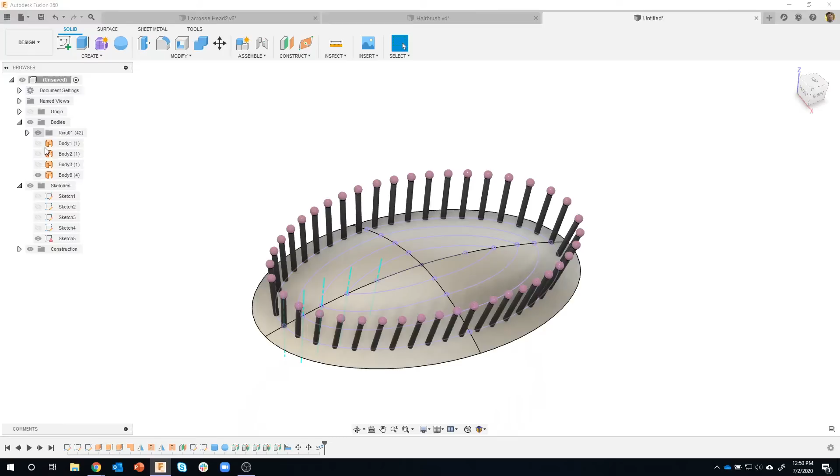I'm just going to drag and drop those into that folder, and notice it tells me there's 42 bodies inside that folder. If I expand it open, there they are. But if I fold it down, I don't have this huge long list.

Okay, so this next part is kind of repetitive. I'm going to do a couple of these and then hopefully stay on time. So I want to reuse one of these pins and do it on the next path.

So I'm going to come in here and say move. I'll click maybe on this original pin right here. I'm going to click on it. Now here's a tip.

Before you move it, come down here and say create copy. And then I'm just going to drag this up in space somewhere, I don't care where. And you'll notice it left the original and it's created a copy.

Now let me back up and show you why I'm highlighting this. I'm going to say move, click on that guy, and move it up like so. You'll notice create copy is kind of grayed out - it's basically saying, oh, you want to move it, you don't need to copy it.

So the trick there is to select it, say create a copy, and then tell it you want to move that copy, is basically what you're saying here. So I do that, and this is pretty much exactly what we did. I'm going to say align.

I'm going to align this body, and I'll zoom up a little bit so you can see. Let me rotate underneath - again, it's kind of black so it's a little hard to see. But I'm going to hover over this edge, and you can kind of see it's catching to the center point of this cylindrical edge.

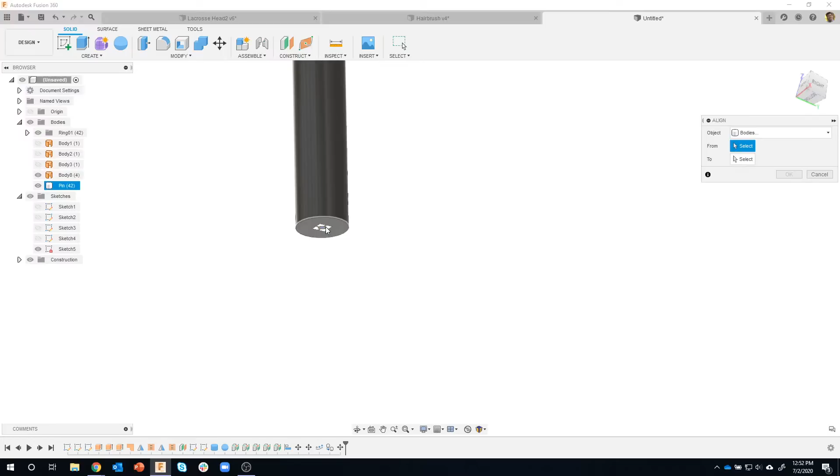Now be careful, because every edge has an end point and a start point, and you can see it kind of grabbed it right there. If I click that, it's not going to give me the result that I want. So take the time to make sure it's grabbing that center point there.

I want that lined up with that axis there - you can kind of see it's lined up. I'll do my move command again, click on there and drag this guy down. I usually look underneath and try to match it to be fairly close to the other ones there, so they're all about the same height or whatever.

Okay, so I did that guy. Pattern on a path - what body, that body there, what's the path - and just like I said, pretty repetitive. I'm going to grab these 4 paths.

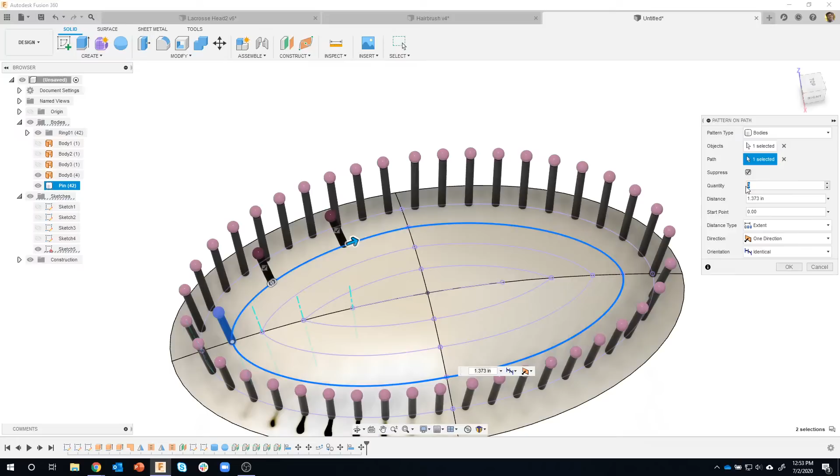I like to start to drag to start to see the preview, and this next ring is 38, I think it is, if I'm not mistaken. I'll drag this guy around like so. Sound effects are optional. And then you can change it from identical to path direction, and you'll see that they all splay out.

Now here's something a little interesting: notice this pin is right on that point. And as I drag this, you'll see it kind of reorient a little bit as it rotates around and stuff like that.

So I try to sometimes increase the quantity so I don't have a pin right on an edge or right on a point. Let's make this 39 in this case. And then I might just drag this closer because I want this spacing. There we go, you can see it's going to look a little nicer as it comes around the corner. So I'll say okay, etc.

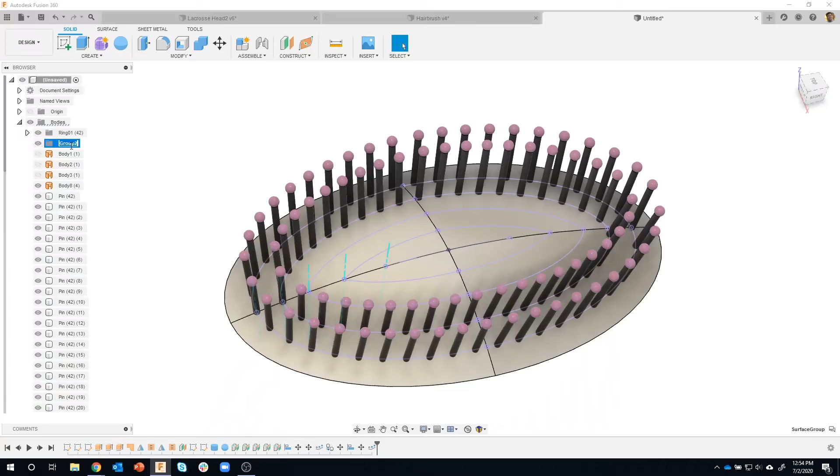Okay, I'll do it one more time real quick. So here's all those pins. I'll create a new group, we'll call it ring 02. I'll shift select all of these and drag them into that group. You can kind of see it tells me the quantity and all that kind of stuff.

Okay, move, I'm going to move the original one again. I could use this inside one, it really honestly doesn't matter in this case. I just kind of like to know, it's easier to see, easier to grab. So I'm going to grab that guy, align, making sure I get that correct edge, not that guy. Notice how it's on the edge, I want to make sure it's the center.

I'll do that guy there, we'll move him in place, let me drag it down just a little bit. I know I'm kind of rushing here. I don't want my wife to find out that I stole her hairbrush.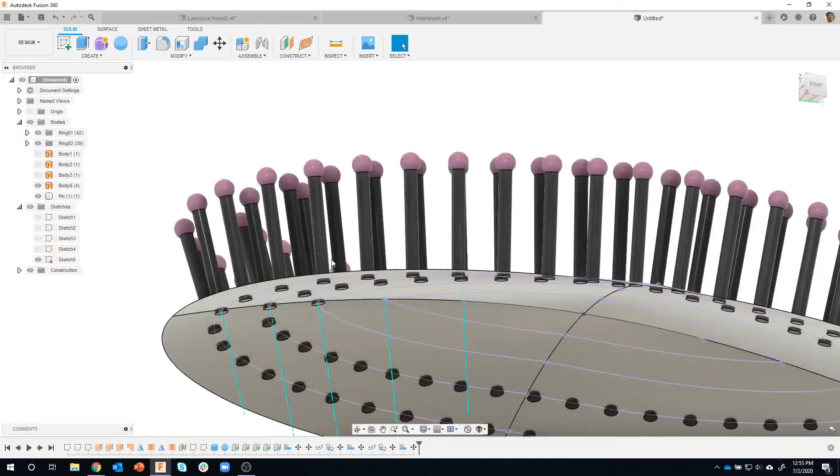Okay, so let's do pattern on a path. Same thing, that body, what's the path? And I do have to select all 4. Now I could just do, you know, right here, and that's as far as it's gonna go. So again, depending on what your path looks like will depend on how far these objects go.

So let's do 30 in this case, like so. Change this to path direction. And you can kind of see how it splays out. And honestly, how quickly we're building this complex geometry, I think is pretty impressive.

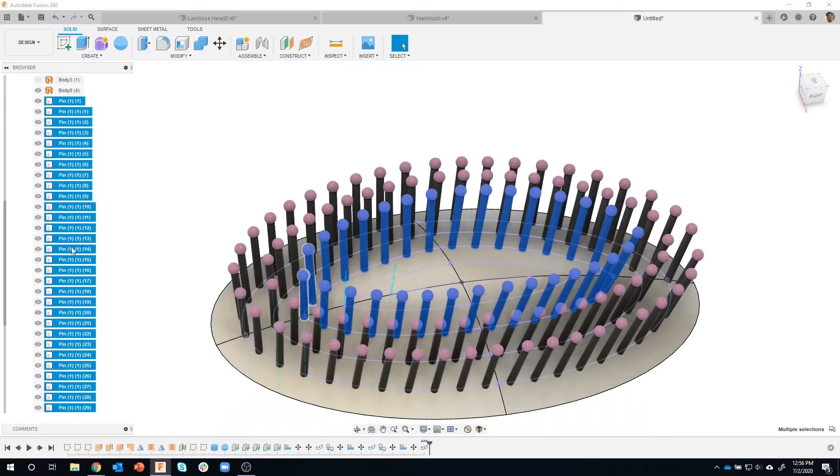So let's just do ring 3. Oops. Put those guys in there. Okay. Move, create copy. Align, I usually zoom up to make sure.

And you can kind of see why we created these axes earlier. So I'm clicking on that axis, it's now perfectly lined up. And you'll notice that angle is different than the original angle. So I couldn't just use one axis and hope that it would work. I kind of captured that information all the way along the path here. So let me do that guy, bring it down.

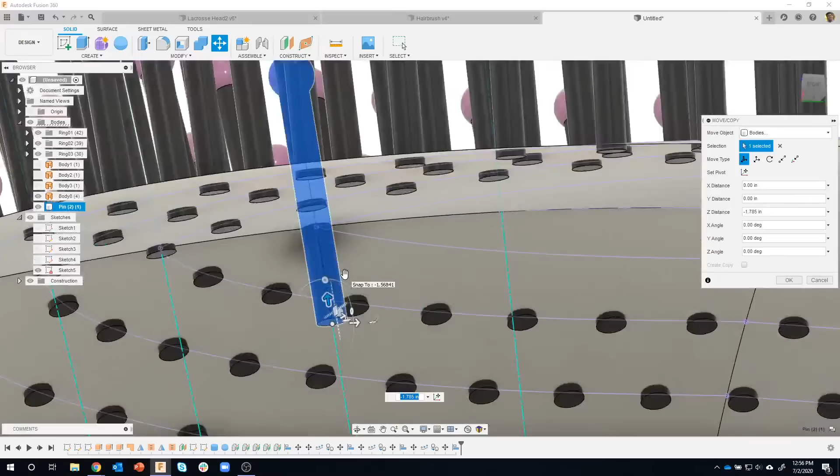And again, like I said, I could have gone point to point to the surface or whatever. I just kind of was thinking, how is this thing actually manufactured? These are like pushed into this fabric and melted or something. I think if you took one apart, you would see that.

Let's do the pattern on a path. And then I'll do the last line for you just to show you how the path doesn't even have to be closed, it can be open. So let's do this path here. And I'll start to drag.

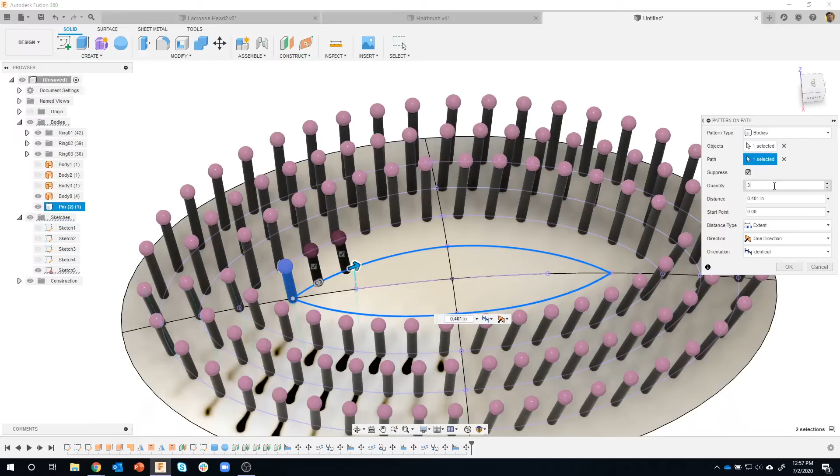I haven't been turning off suppress like I showed earlier, but that's okay, you don't have to, I just think it kind of speeds things up. So we'll drag around. Path direction. Okay, now sometimes you might get, I guess they're kind of leaning in. Again, it depends on the quality of the path and all that kind of stuff, so you might get some different results.

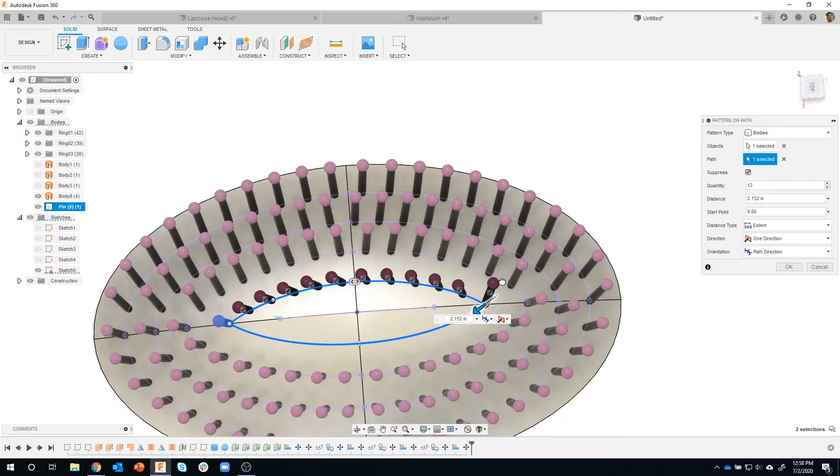And to me it seems like these are leaning inside a little bit more than I wanted it to, and it could be because of how tight this path is on the corners. So I might instead set this to maybe like 12 and do this in two separate paths. You can kind of see, like I could do it on this side, doing the path direction, and then I could do it on this side also as a separate one, and that might get me a better result.

Okay, so I'm just going to leave that and get to this last pin here. So let me do, let's see, move this guy, copy, drag him out in space somewhere, doesn't matter where, but you do have to align. And I'll align it with this last axis right here. Move it into place, and you can see once you get the process, it goes pretty quick.

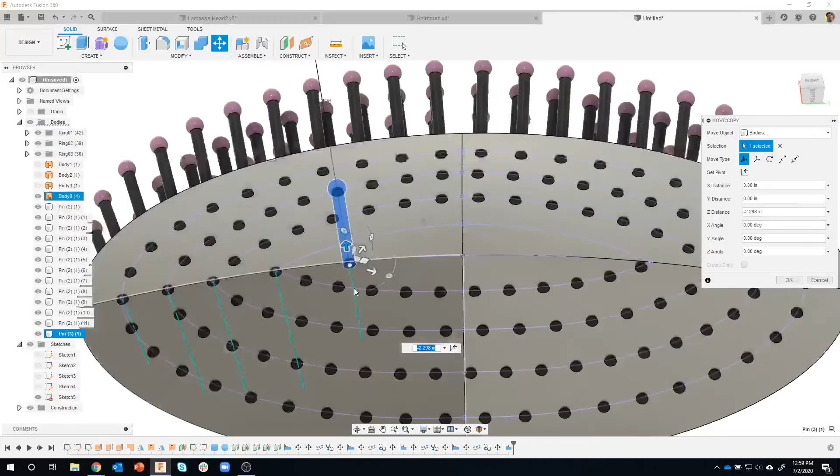Again, think about how long this would take to do manually or whatever. And then create pattern on a path.

What's the path? Let's say this line right here. You can kind of see as I'm dragging that along, I'll say path direction, and you can see how it's following that path direction. I think in this case it's pretty small, only like 8, and I'll go to the end right there. Okay, so that's the basic idea.

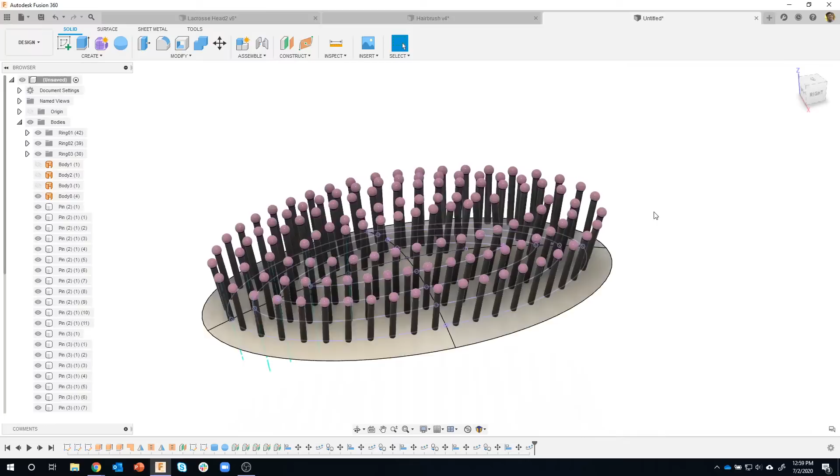I could do this other one the other direction, but I'm going to leave that for now since we're running out of time. I wanted to show another cool command we just added, so let me do one more group here. I'll say rest, and put all of these guys in here.

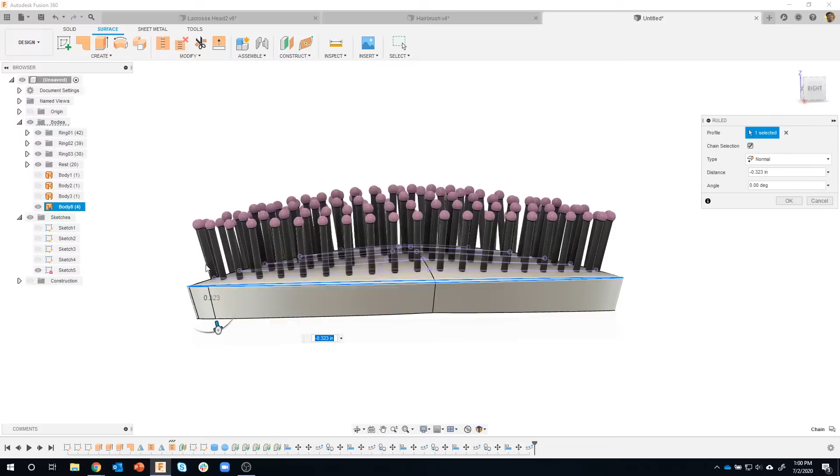We just recently added the ruled surface. What this allows you to do is pick on a profile like this guy here, and then you can specify a distance. You can see in this case it's going normal to this edge, so it's kind of tucking in a little bit. I can go tangent to that edge - see, if I pulled out that direction, it would basically extend the tangencies of that.

Or I could say direction - it's hard to see because it's kind of buried, but I'm going to click in the Z direction, and now it's taking that edge and basically allowing me to extrude that edge as a ruled surface. So I'm going to go down a quarter of an inch in this case.

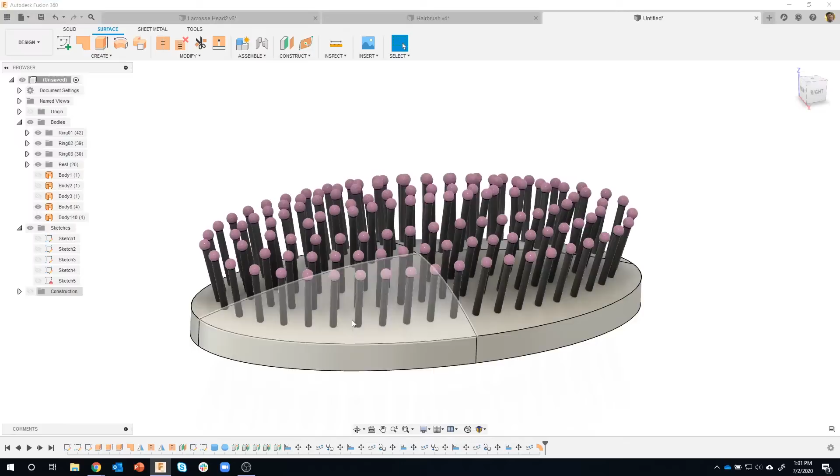Now I'm going to turn off that sketch to simplify things. I want to put this surface on the other side. I could say mirror, but my origin is up on this level right here, so I'm going to say plane along a path.

What's the path? I'll click on this edge right here - it's gonna be hard to see because it's really tiny, but I'm gonna start to drag, and you'll see it snap proportionally halfway. That's what that is right there. I could have also said physical and typed in 0.125, since this is a quarter inch in thickness, but I'm going to say proportional, and it'll basically snap automatically there. I'll say OK.

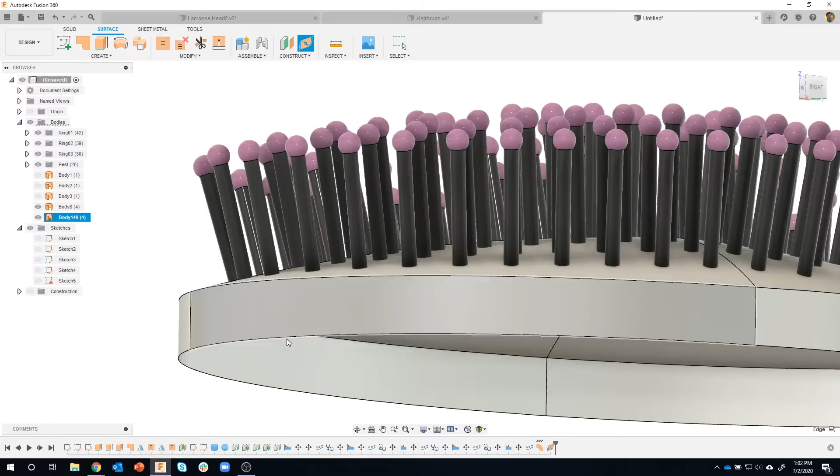I'll turn my construction back on so you can see it, and grab the corner so we can make this a little bit bigger so you can see what we did. So we just created a plane that's halfway through that line.

Now if I were to say mirror, what do we want to mirror? Well, I want to mirror that guy. What's my mirror plane? That guy there. Watch what happens when I say OK - it took that surface and mirrored it along that plane to the bottom side. But you'll notice I now have 1, 2, 3 separate surfaces.

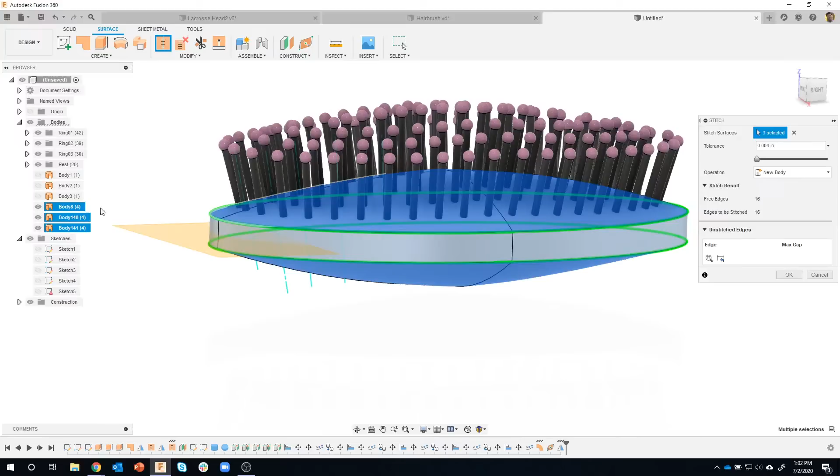They're not actual bodies, but if I came in and said stitch - that guy, notice the edge turned green, and that guy, notice that edge turned green. Watch what happens over here when I say OK. I now have an actual body.

So I'll say brush head. This is an actual body - I could section through it and all that kind of stuff. I could combine all of these pins into it. I could come in here.

Let's just add a quick fillet all the way around. Let me grab all 4 of these edges, and let's do maybe 0.1, or 0.05 which is what I tried earlier. I'm gonna go 0.05 - yeah, so you can see how it's gonna fillet all the way around.

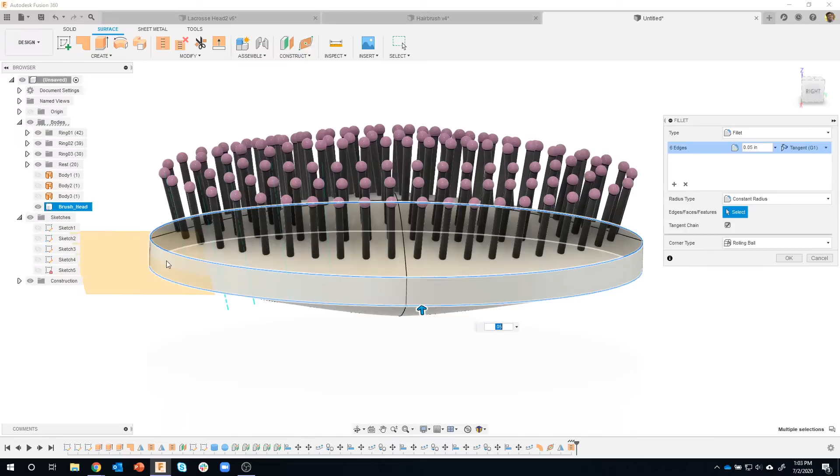So let me grab these other edges - you can see that I can even pick through. I'll say OK, and then finally maybe we add an appearance, A for appearance. I'll use that black, drag it onto that body, and now you can see we've got the head of the brush.

All we'd have to do now is the handle, for example. So this allowed me to reuse these existing surfaces - I just mirrored them straight down and combined them together basically into a solid body.

Okay, so hopefully that gets the gears turning for where you could use pattern on a path. That's why I showed that lacrosse head and a hairbrush. Maybe you're designing a toothbrush and it has features that go along the curvature of the toothbrush - you could use pattern on a path to add those features along a surface or along an edge, for example.